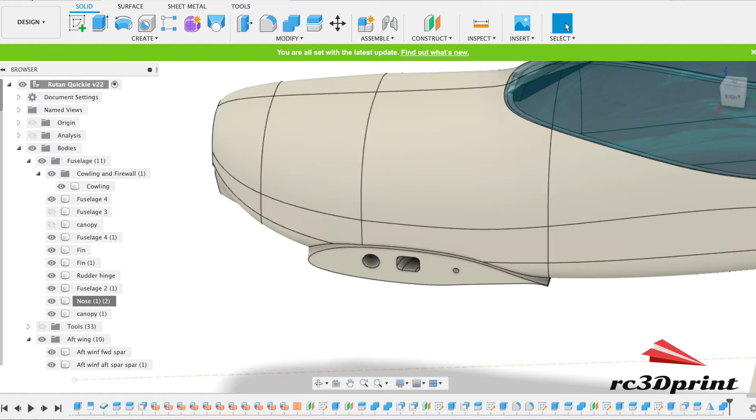So I'm going to save it as an STL. In this case, I can send it to 3D print utility and Cura.

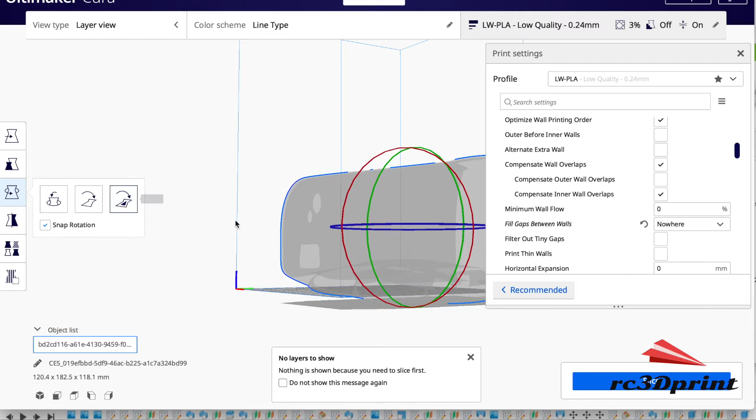Here we go, delete that model because that's one I've already done. And there it is, it's not in the middle. We're going to print this piece on this front face.

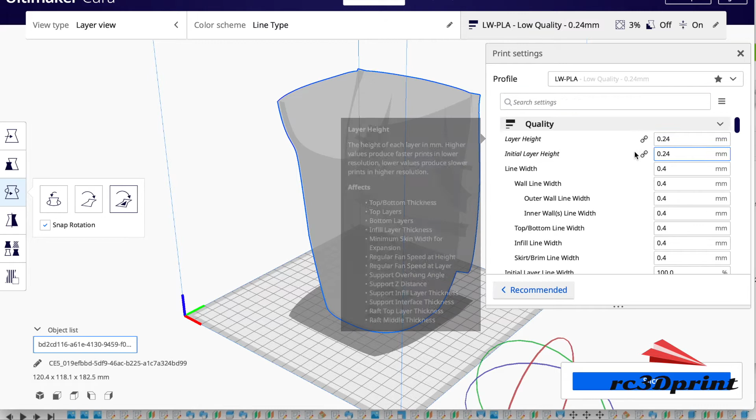It does annoy me when it does this. There we go, and arrange all models.

And then looking through, I've got a lightweight PLA profile in here, so I've set my layer heights. Wall thickness is a nozzle width, that's 0.4 with one wall line count.

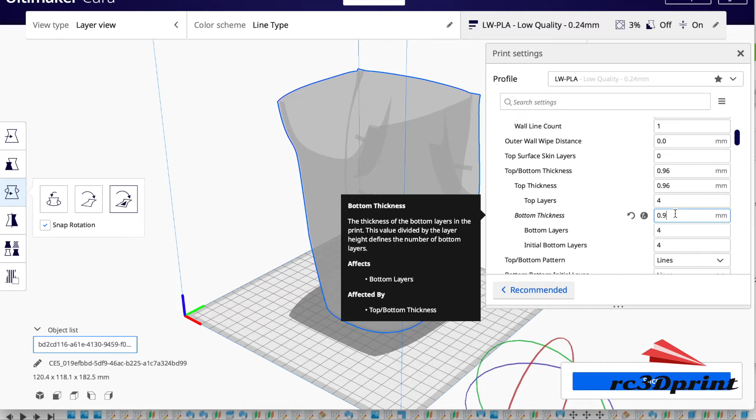And top bottom thickness, now because this one here is a firewall, I'm going to increase that to 2 millimeters. So we're going to get 2 millimeters of plastic with which to bite into. And because it's lightweight PLA, I might use some washers behind that as well.

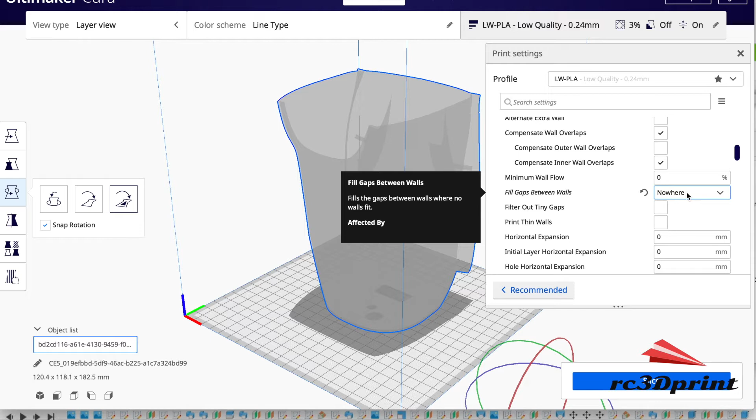And we want lines, any other pattern doesn't really work. This is the setting that we may use with the lightweight PLA, and this is whether it fills gaps that are too thin to have it infill, which I think is what I've done here, but I'm tempted to go back and change the model.

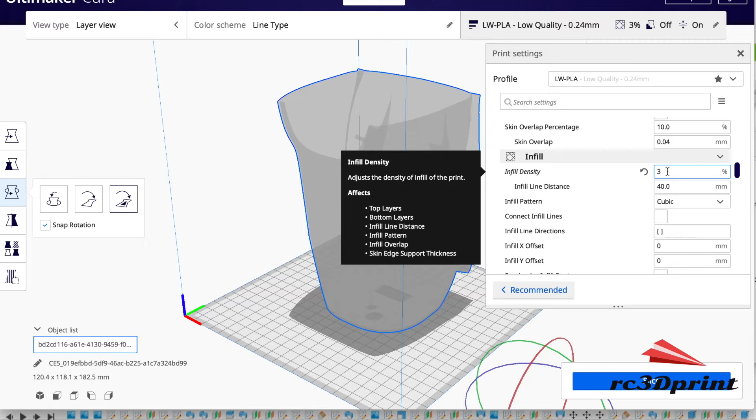And I'm going to go for user specified on this one, and back. We have the seam running up the back on the bottom of the aircraft.

Infill density, I go anywhere between 1 and 3 generally, depending on what we're printing with. For this piece though, because we've got an area here that has rods running through, I think 3 is going to be a good starting point.

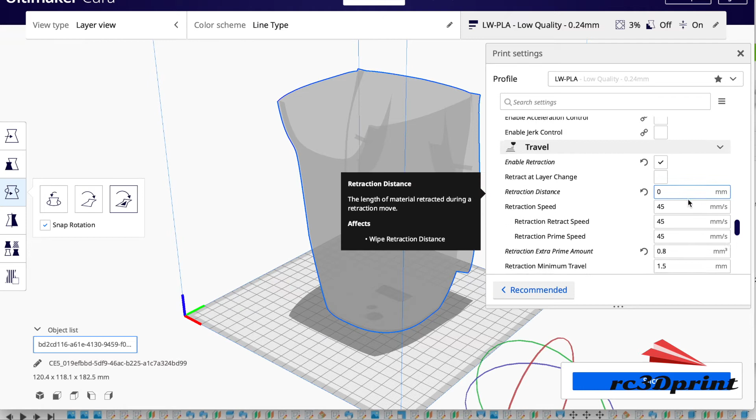Temperature for me, 240 degrees. There's my build plate temperature, and 55% flow. And there's my speed settings as well.

If you are using lightweight PLA, I highly recommend you follow the ColorFabb instructions for printing with lightweight PLA. We don't want any retraction, that's why my retraction distance is 0, but I do want the extra prime amount of 0.8. And that's why retraction is ticked.

Cooling, just have the fan on low. And for this one, we're going to need a support to print this part here.

So I'm going to click enable support, and then we'll start with 60, but we'll check that we don't get supports in areas where we don't need them.

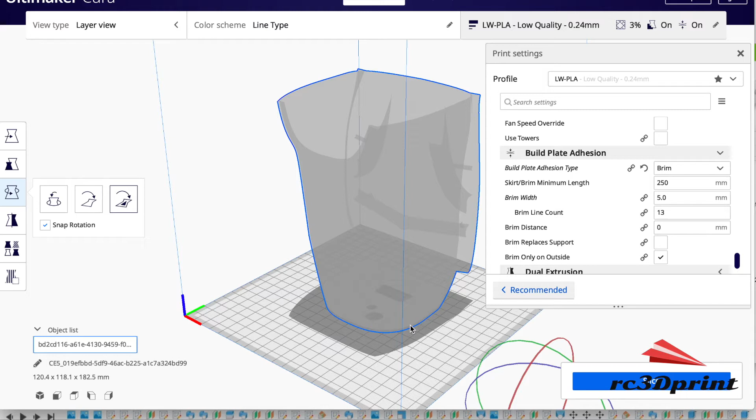And I'm going to go with a brim, just because it helps it stick, and also occasionally if I get any warping, I've got some little magnets that stick to my print bed and I'll put them down if I can see that the brim is starting to come up. That prevents warping.

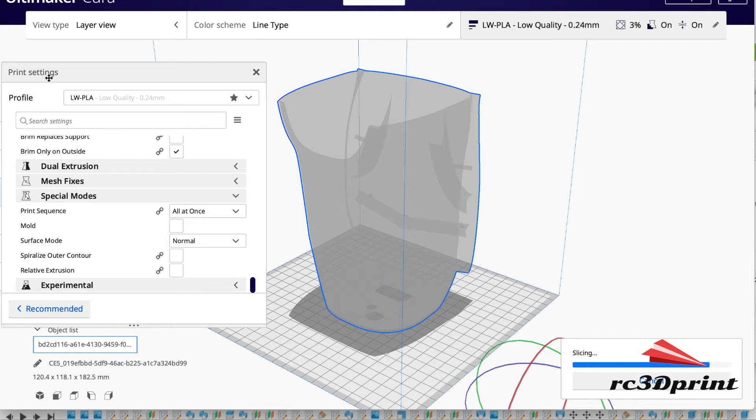Okay, click slice. Computer does its job.

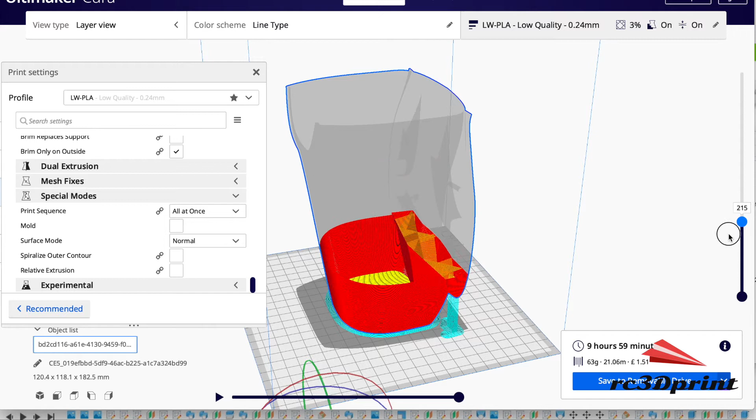Alright, so actually that is exactly where I wanted the supports. So we haven't got supports elsewhere where we don't need it.

Let's take a look through the model. Starting at the bottom then, we've got our thick 2 mil base, and then we start printing up here.

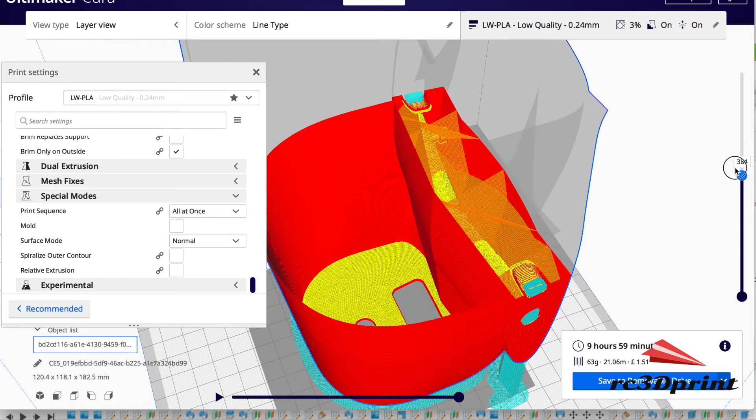That's a bit of a pain, it's printing supports in there. Don't want that, that's what the blue is. And then likewise it's printing supports there. I don't think we need that, and I think we'll find it very hard to get them out.

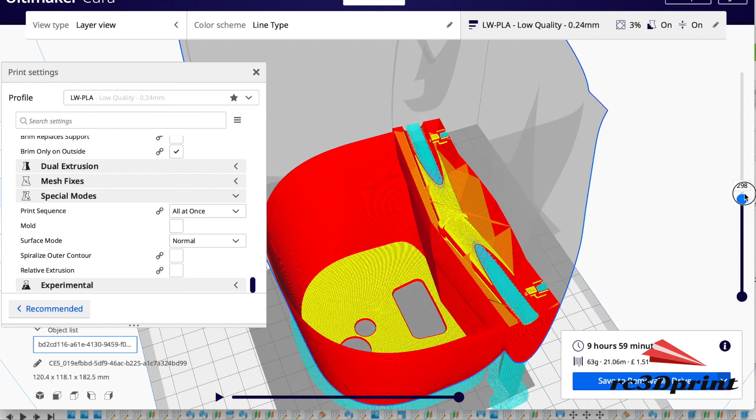So I'm going to go away and think about how we can prevent that. But the other thing I'm going to do is just put some internal lines to help print these parts here that are currently printing in midair, and this part here as well.

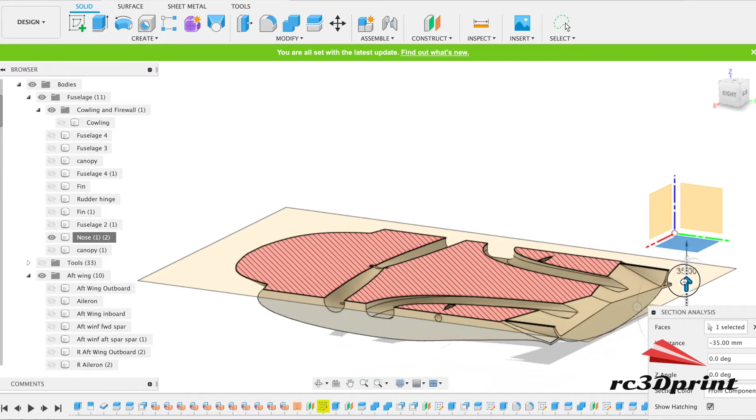So we're going to go back into Fusion to do this. Come back into the Fusion model, and I'm going to go for a section analysis like so.

I'm going to come down until... what I was actually looking to do was to get halfway along that.

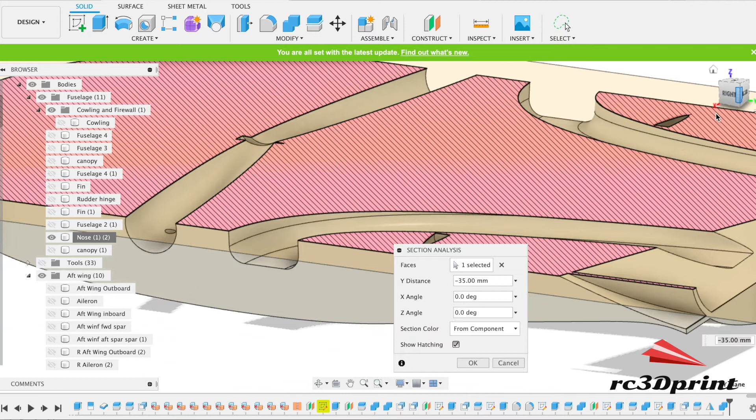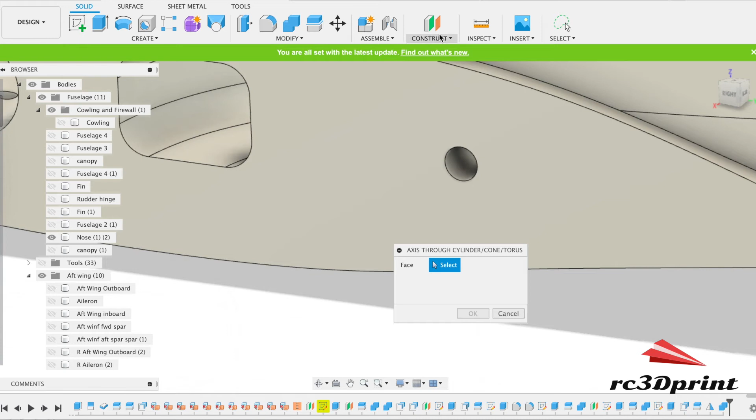Okay, so actually I know what I'm going to do. So, that's good. So I'm going to have that section ready and waiting, and I'm going to put an axis through a cylinder.

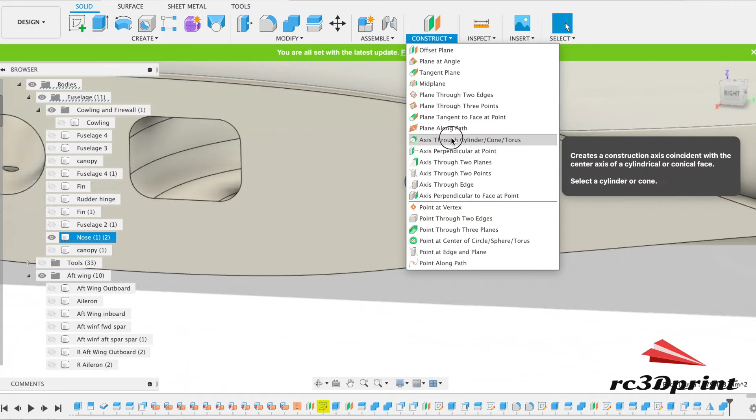Sorry, is that the right one? Yeah. Nope. Snapping.

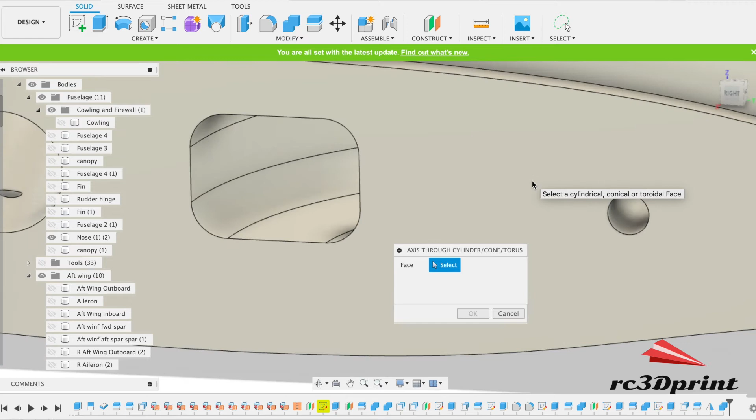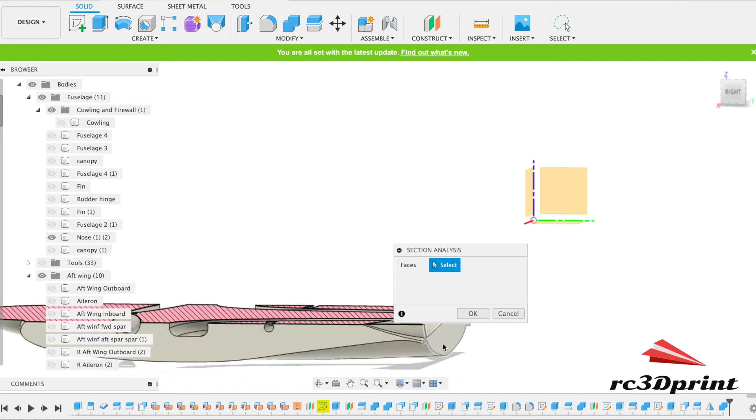Okay, a tiny bit of a loss there as to why that's not having it. We'll have to do it slightly differently. So I'm going to make another analysis now. These are all stored up so you can use them again, which is quite handy.

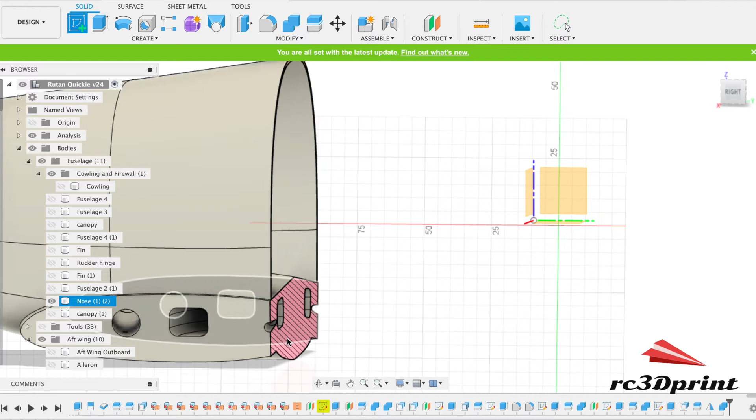Okay, and we'll view that last one. And a construction plane.

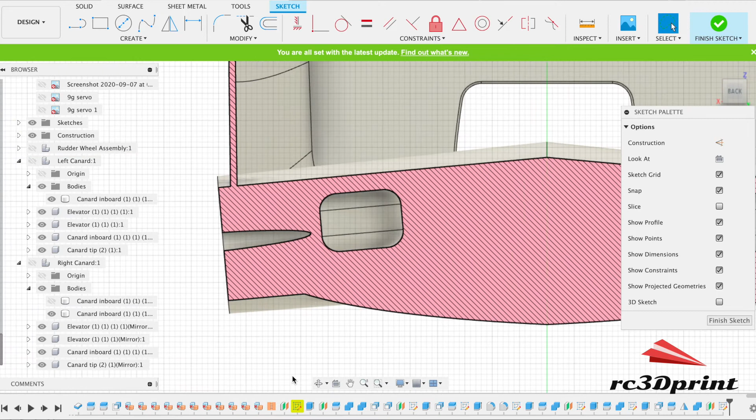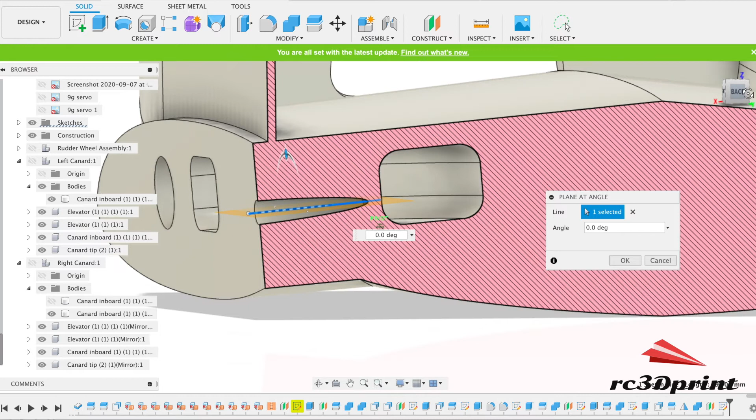Okay, I'm going to make a sketch. There we go. Now I want to plane it at an angle, and I think the angle is good.

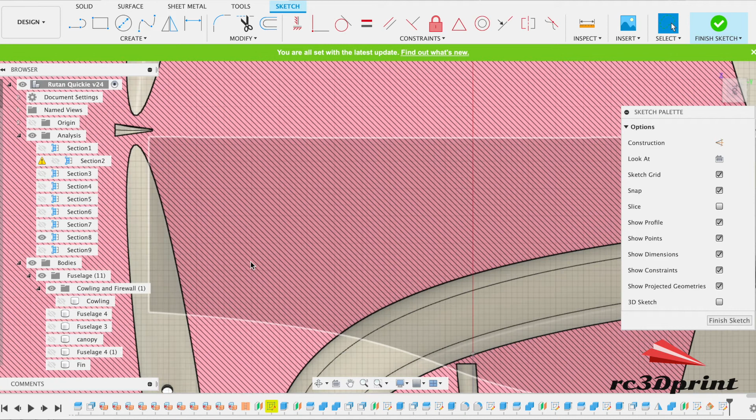I'm going to make a sketch on this plane. Now we're going to change which analysis we're using for this one. I wonder if having a proper mouse rather than a trackpad takes away these issues sometimes. Okay, project, or actually rather intersect.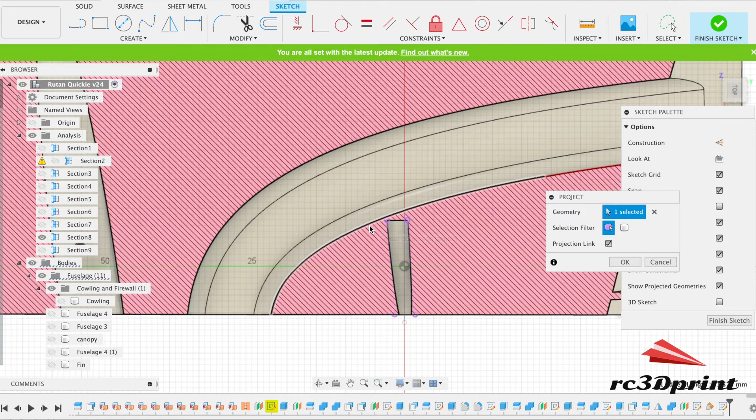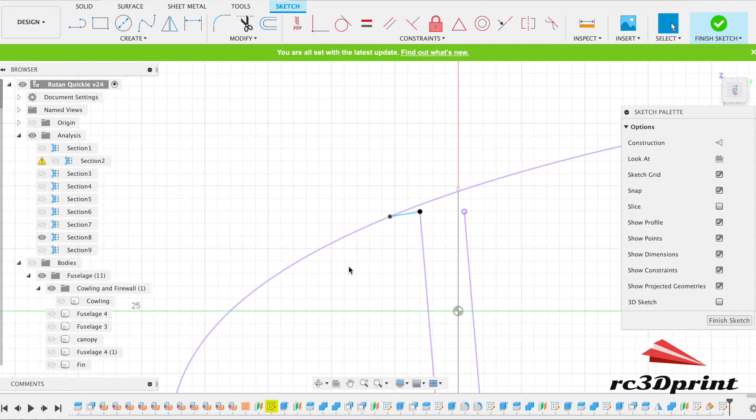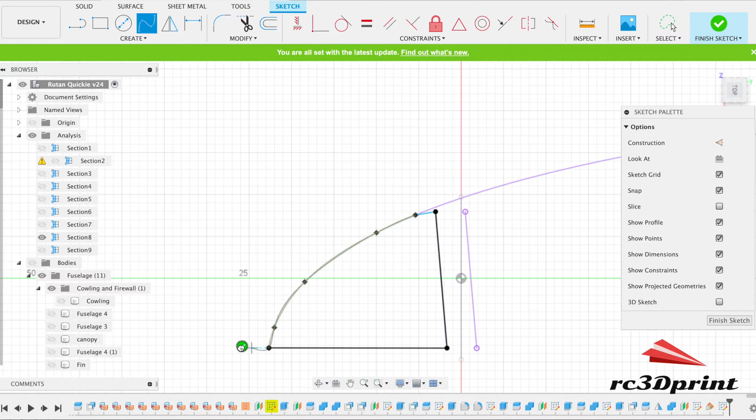Let's try project. All will become clear soon. Quite why that's not selectable, I don't know.

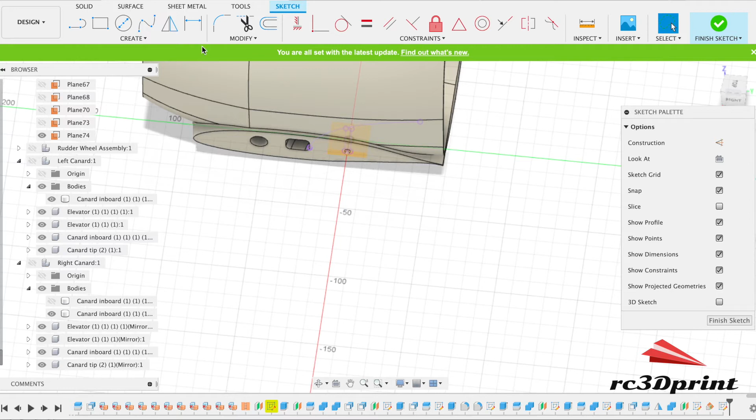I'm going to cancel that section. I'm going to come back and get the construction plane that we just made, and make a section analysis on that. There we go. Okay.

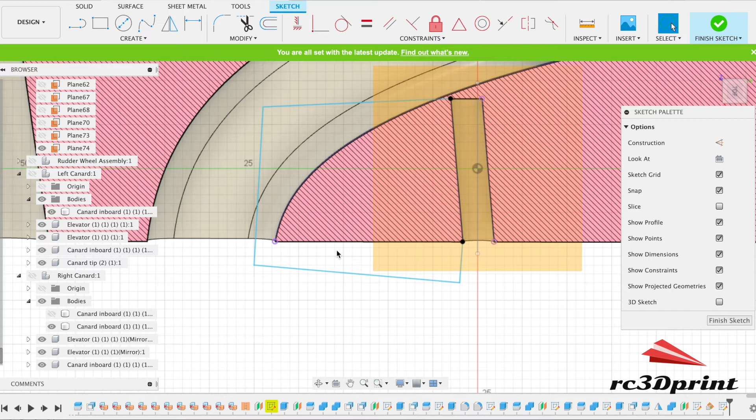This is fine. I'm going to finish that sketch. It's not doing what I want it to do. I'm going to start a new sketch.

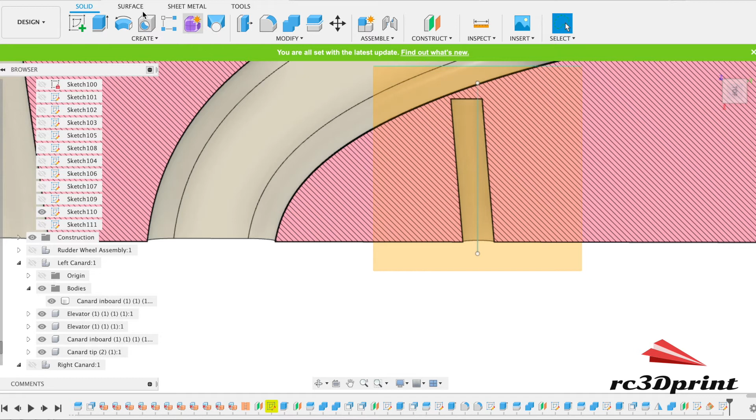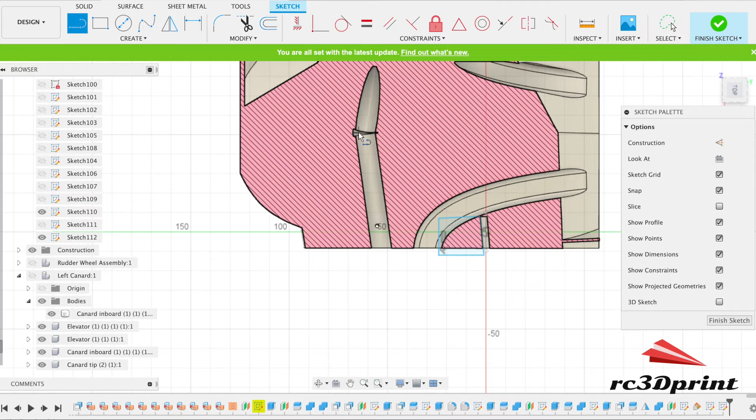Confusing the issue with that. So, sketch on my construction. Right, there's one, and I'm going to do another.

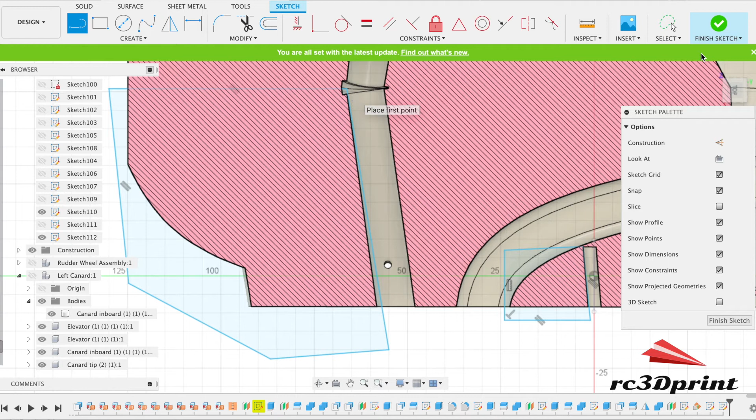Okay, finished sketch. Get rid of that.

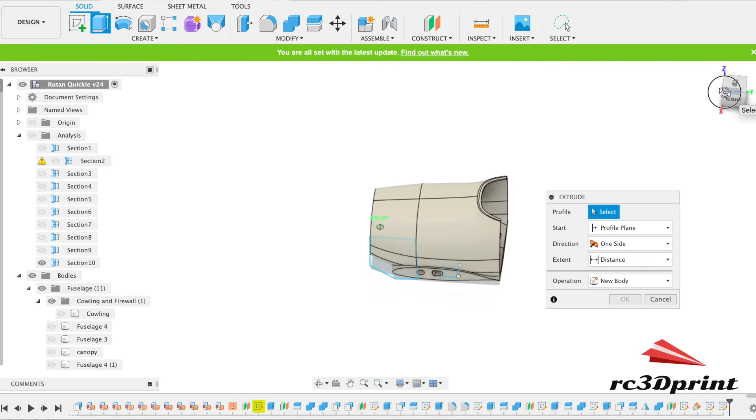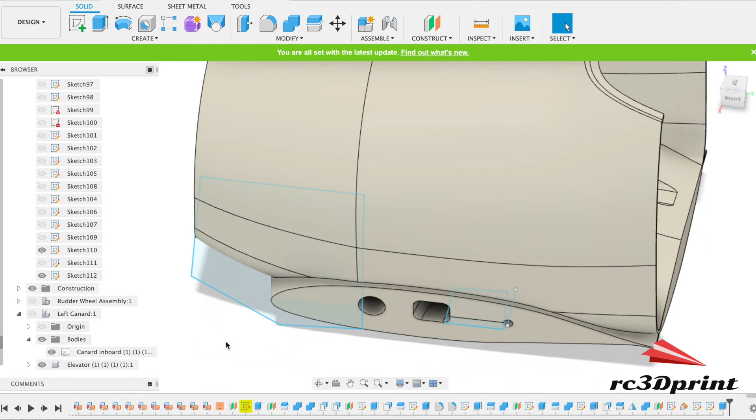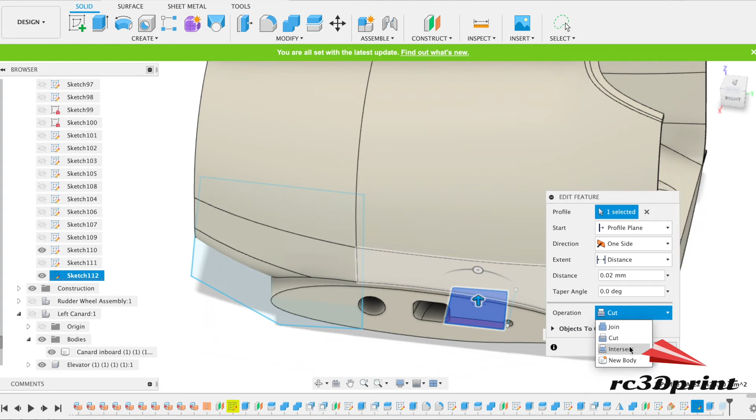So what we're going to do is we are going to make an imperceptible slice in the model. The model is not broken. We've got to make sure we don't do it the whole way through the model, because then it would be two separate STLs. But the slice is deep enough that when we put it into Cura, Cura recognizes that there's a line there.

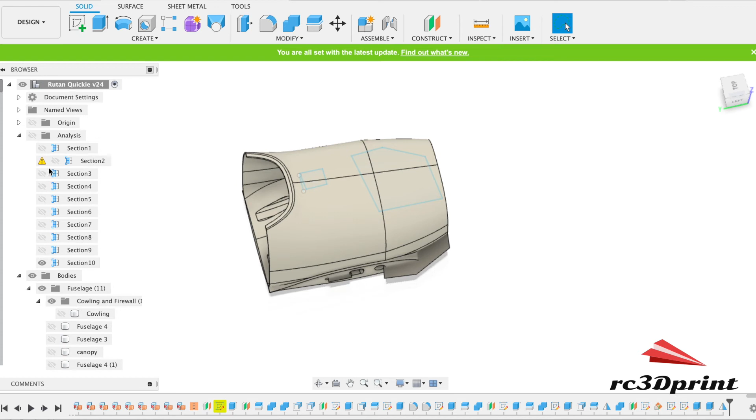Now, of course, I've done it like that because we need to mirror them. And it would be good as well if Cura can do it as a single line, these two. Cool.

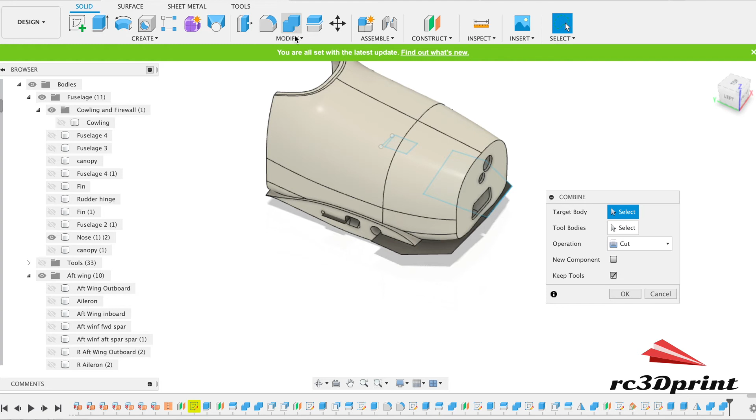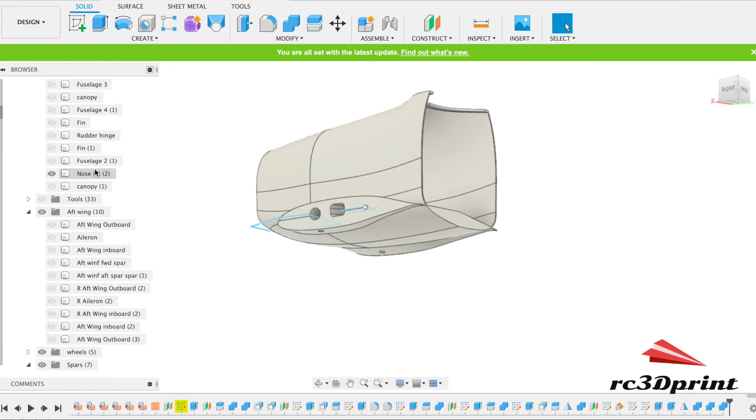So all we do is cut. And cut. And this is really handy when you need supports that are not in the model when using, this is using my technique, using the technique where we're using solid bodies.

Right, so we get rid of that one now. Come back to this one. It's going to increase the print time. It is going to increase the weight. I wouldn't do it all the time. Printing with normal PLA on this model, I do not think it would be necessary.

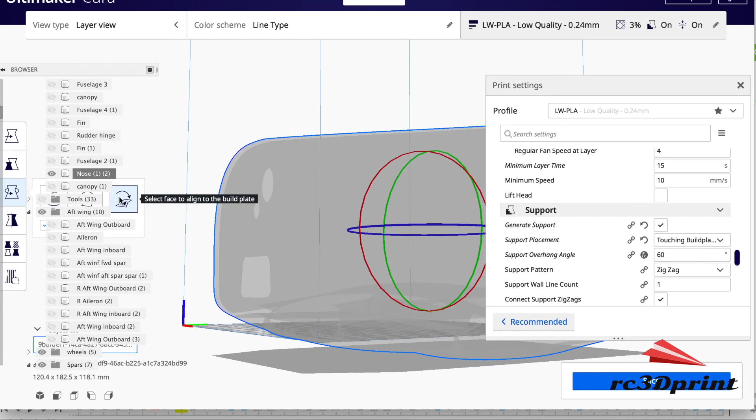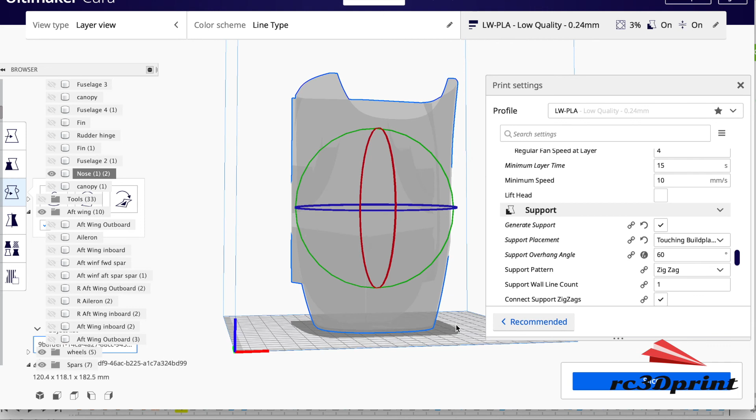Oh, man. Right, select the model. Right, isn't it? Okay, here we go. And slice. And then I'll be able to show you what we've done.

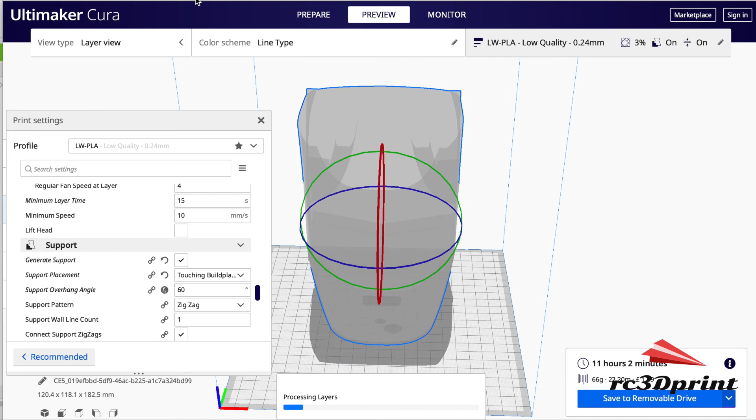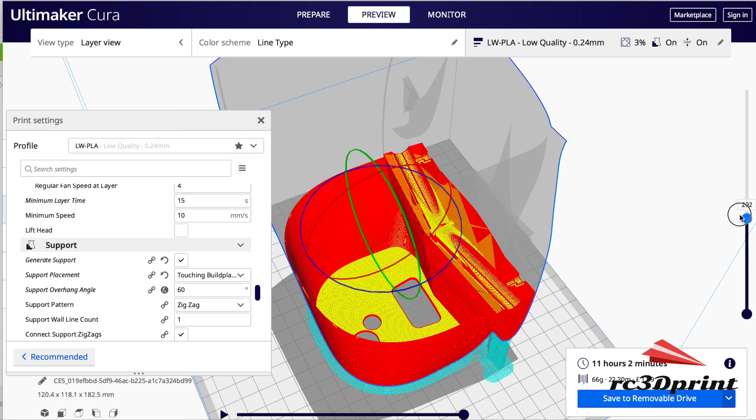Right, let's have a look, see if our lines are there. So what I wanted to do was I wanted to try and put some kind of build line, and you can see up the middle, this is it here, that then supports the building of our line there. And then on top of this, there we go, here, got another one that supports that one.

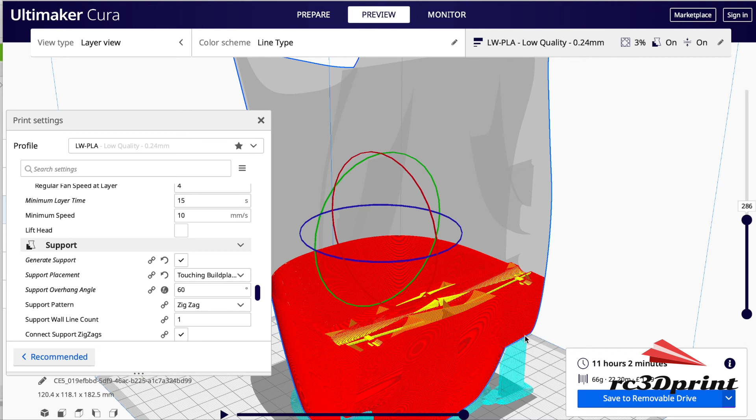So I'm not going to record it, but I'm going to go away and do exactly the same for these two screw joins. Just bring a line down so that they have something, and then it'll be ready to print.

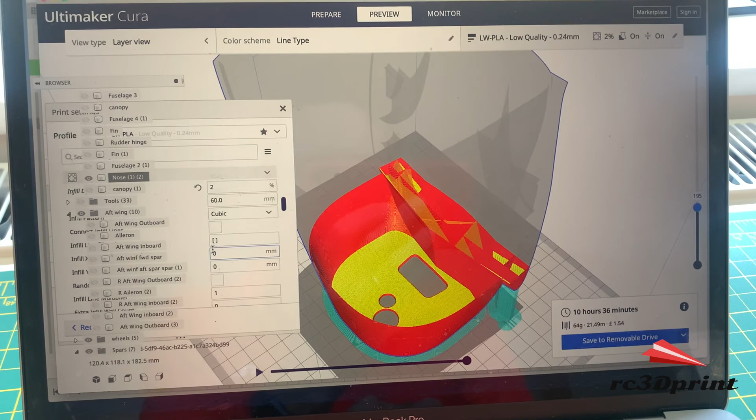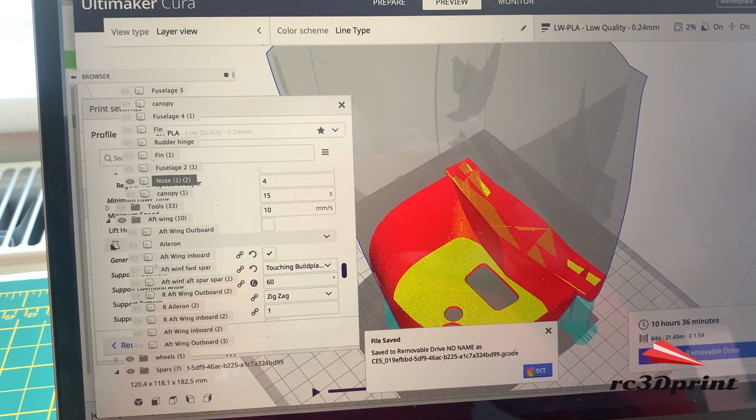Alright, so here we go. We've got it sliced. I've added in my little lines of material for a bit of support, and I solved the support only on the outside by just changing the setting, touching build plate basically on placement. There we go, that one. Alright, so now we're going to save it to our removable drive. Meanwhile, printer's turning on.

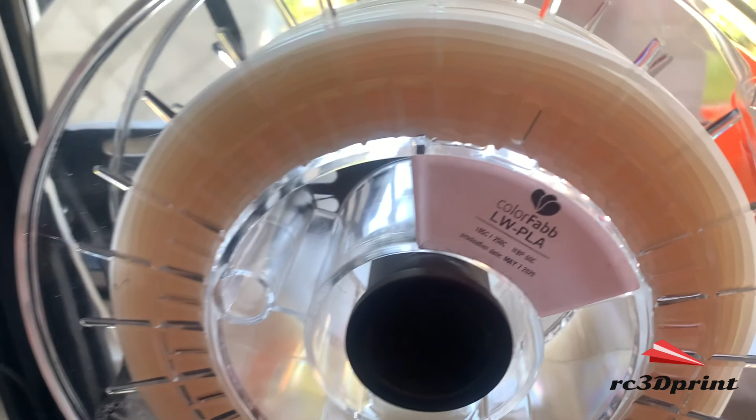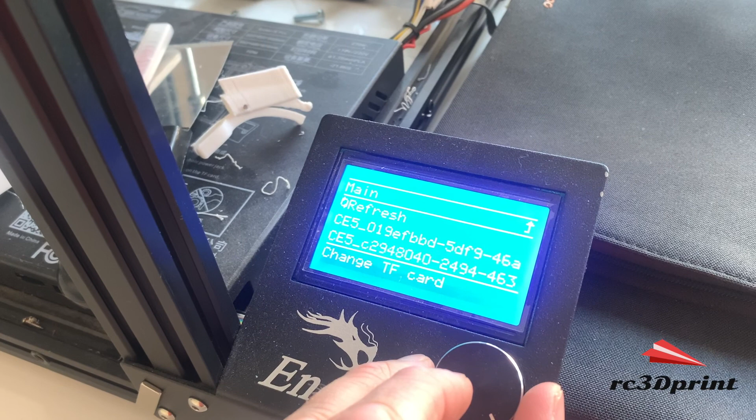Okay. So I've got ColorFabb LW-PLA here, and let's get printing.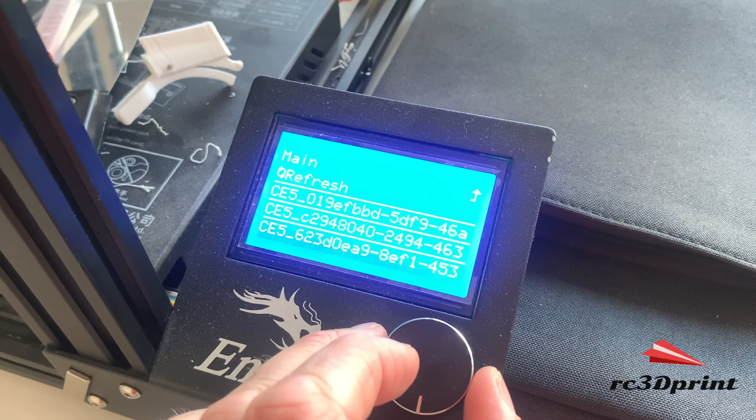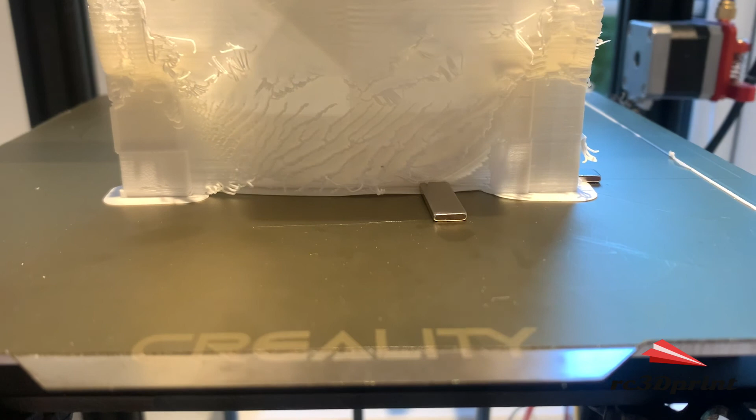Oh, see, come too far. There we go. Cool, right, and we'll come back and see how it's getting on in a little bit.

The adhesion can come off the bed. I mean, it's pretty rare, especially with this base, but I have found with larger prints that this can sometimes happen. And usually if I level the bed afterwards again, it'll go away, but sometimes if it starts happening midway through a print, it's quite frustrating, especially when you're using expensive stuff like this lightweight PLA.

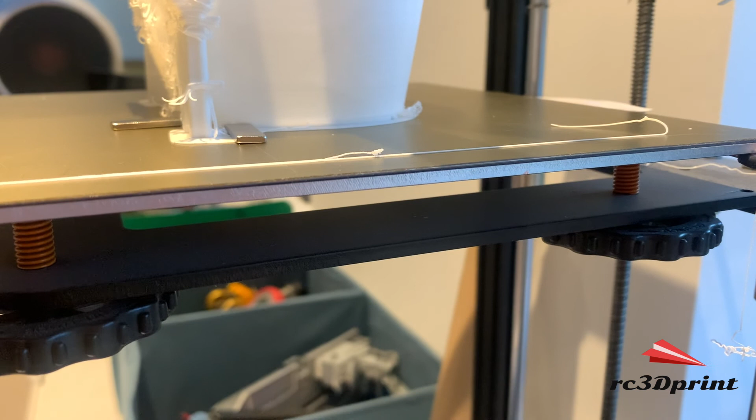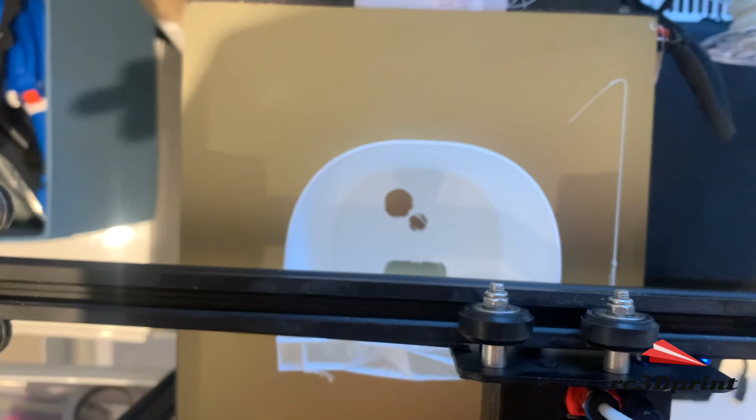Don't worry about all that stringing, that comes off incredibly easily. But anyway, my solution is I just use a few magnets. As you can see, they just hold down the adhesion. So it's a good reason to use a brim, otherwise there's nothing to hold down.

And here's our nose structure coming along quite nicely. Then after a weekend of printing, we've got most of the fuselage together.